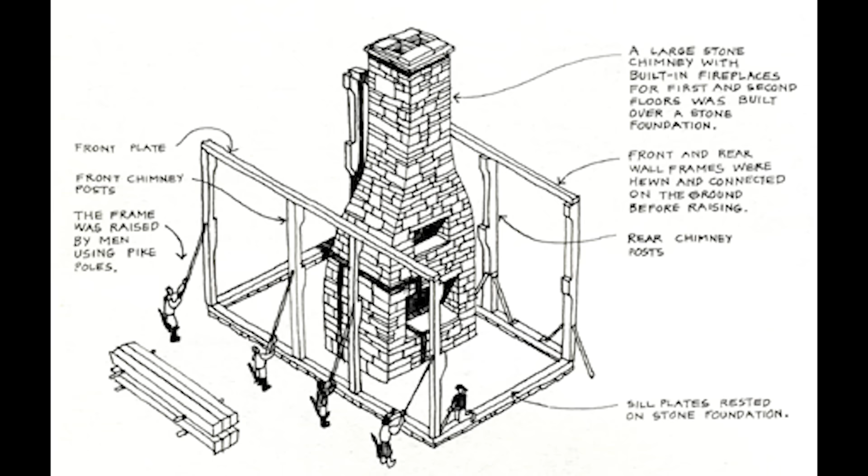The limestone hills of southeastern Pennsylvania cut deep in the winter of 1754 when Johannes Meyer learned that building by the book could kill you. His first cabin followed every rule the English settlers swore by: exterior brick chimney on the gable end, thin log walls, standard and trusted construction that left his family shivering at 38 degrees inside while burning through 2 full cords of wood before February ended.

Across the Pennsylvania frontier, German and English settlers alike were losing the same battle in cabins built exactly as frontier wisdom demanded, waking to frost on interior walls and empty woodsheds. Over the next 2 seasons, Johannes quietly shifted to an older method, building around a massive central stone tower that neighbors mocked as wasteful space. That single change kept his cabin 20 degrees warmer through the coldest nights, cut his wood use in half, and left his chimney warm to the touch 8 hours after the last fire died. What did Johannes understand about heat and stone that every frontier builder was missing?

The Pennsylvania German settlement stretched across the limestone hills like a checkerboard of ambition and old-world memory. By 1753, families from the Rhineland and Swiss cantons had carved homesteads from the heavy timber of chestnut and oak, each cabin representing a compromise between what they knew from Europe and what the Pennsylvania frontier demanded. The immigrants carried guild knowledge in their heads and calloused hands, but the established English settlers had already set the building rules, and deviation meant isolation from supply networks, labor exchanges, and the informal codes that kept frontier communities functioning.

Challenging established building wisdom would mark Meyer as troublesome, potentially cutting him off from the labor exchanges and barn-raising cooperatives that made frontier construction possible. Meyer's own position made the risk more complicated. Unlike many of his neighbors, he possessed genuine masonry skills from his European apprenticeship, but he also needed to establish credibility in a community where English methods dominated.

His first cabin had followed Whitaker's specifications exactly, partly to demonstrate that he could build according to local standards. The results, a cold, fuel-hungry structure that required constant attention to maintain basic comfort, convinced him that compromise was killing his family's chances of thriving through multiple Pennsylvania winters.

The breakthrough came when Heinrich Schmidt, a joiner from the Palatinate who had worked on guild projects involving Kachelofen installations, arrived in the settlement during late 1753. Schmidt carried detailed knowledge of multi-room heating systems where several fireplaces fed into a single masonry mass, creating what he called a heat castle at the center of the house.

European builders had refined these systems over centuries, learning to balance thermal mass, fuel efficiency, and interior comfort in ways that frontier practice completely ignored. Schmidt's expertise provided the technical foundation that Meyer's intuition had sensed but couldn't fully articulate.

The decision crystallized during a March blizzard that killed 2 head of cattle and forced the Zimmerman family to burn furniture to stay warm. Meyer committed to building his new cabin around a central stone chimney that would weigh approximately 8 tons and occupy nearly 1/4 of his interior floor plan.

Secondary channels, roughly 6 inches square, wound through the masonry mass in serpentine patterns that maximize contact between hot gases and stone surfaces. These secondary channels allowed heat that would otherwise escape through conventional chimneys to transfer into the thermal mass, where it could be stored and slowly released over periods ranging from 6 to 12 hours after the fires died.

Stone selection proved critical to the system's thermal performance. Meyer rejected the easily split sandstone that most builders preferred for its workability, choosing instead dense limestone and granite fieldstone that Heinrich Schmidt tested using a simple but effective method. Schmidt heated sample stones in a bed of coals, then monitored how long they remained warm to the touch after removal from the fire.

Limestone held heat for 3 hours and 40 minutes. Granite maintained warmth for nearly 5 hours. Sandstone cooled to air temperature within 90 minutes. The denser stones cost more in transportation and required more skilled cutting, but their superior thermal retention justified the additional expense.

The construction technique followed European masonry traditions adapted for frontier conditions and materials. Each stone was individually fitted and shaped, with no gaps larger than half an inch between adjacent faces. The mortar served primarily to seal air leaks rather than provide structural bonding. The stones themselves carried the compressive loads through direct contact.

Meyer and his crew worked in lifts of roughly 3 feet, allowing each section to cure for 5 days before adding the next level. This methodical approach consumed the entire summer of 1754, far longer than the 8-day cabin construction that Thomas Whitaker's crews routinely achieved. The structural integration with the cabin frame required careful coordination between masonry and carpentry work.

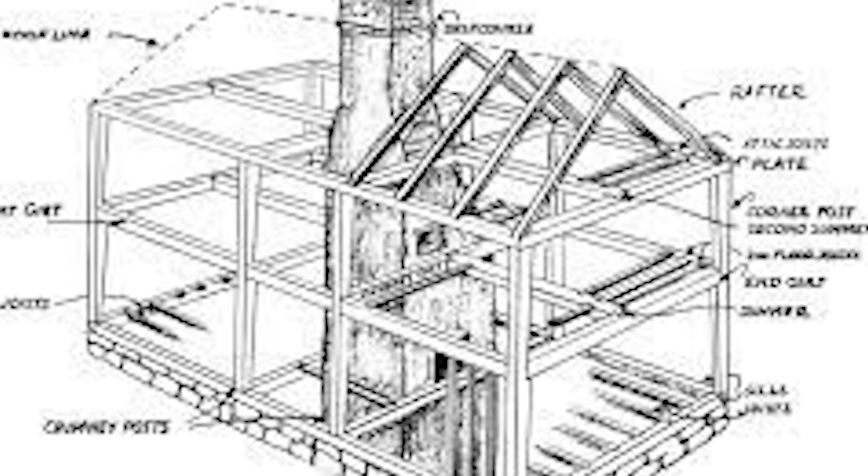After maintaining fires in 3 of the 4 fireboxes for 6 hours, Meyer allowed all flames to die completely, then monitored the surface temperatures using the palm touch method that frontier builders relied upon before thermometers became available. The chimney surface remained noticeably warm to the touch for 11 hours and 15 minutes after the last coals died, with measurable heat radiation continuing for an additional 4 hours beyond that point.

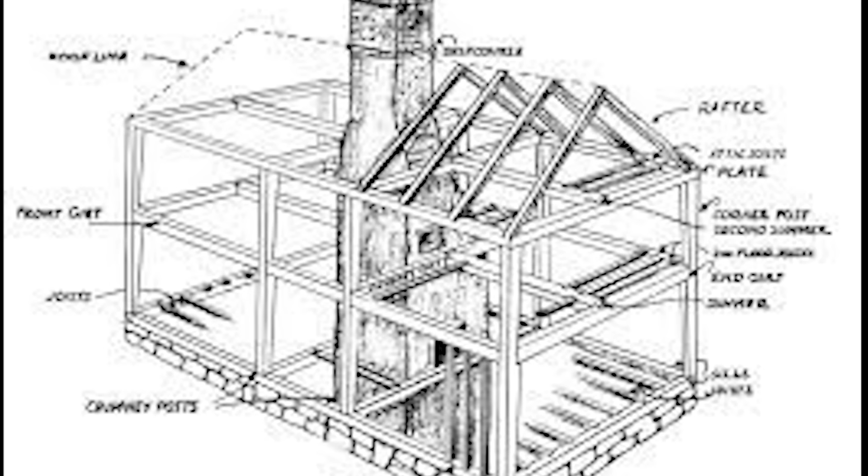By comparison, the exterior chimney on Whitaker's demonstration cabin, built during the same period with identical fuel loads, cooled to air temperature within 3 hours of fire extinguishment. The fuel efficiency gains became apparent during the first extended test period in early October.

Meyer burned seasoned oak split into 18-inch lengths, maintaining comfortable interior temperatures with approximately 60% of the wood that conventional exterior chimney systems required for equivalent heating. The multiple firebox design allowed him to concentrate fuel in whichever room required the most heat, while the thermal mass distributed that energy throughout the entire cabin structure.

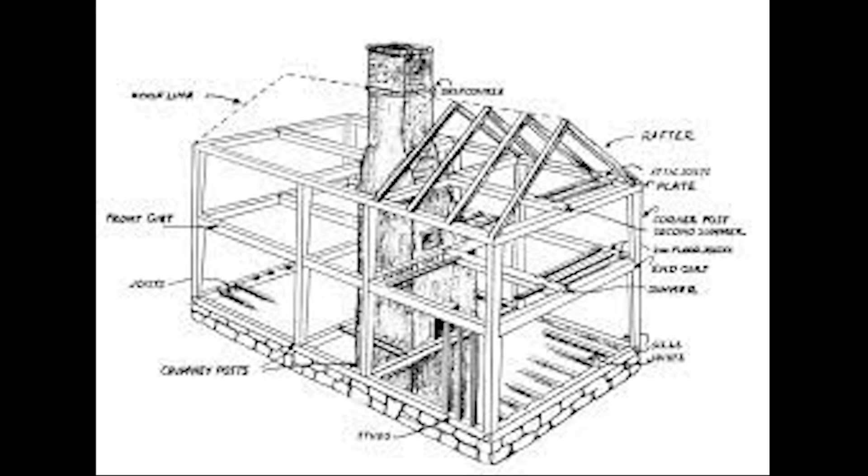The first serious cold snap of November 1754 revealed a critical flaw in Meyer's otherwise revolutionary heating system. Despite the central chimney's impressive thermal storage, interior temperatures still dropped faster than Schmidt's calculations had predicted. The problem became evident during a 3-day storm, when outside temperatures plummeted to 8 degrees Fahrenheit and fierce winds drove snow through gaps around the window frames and door jambs.

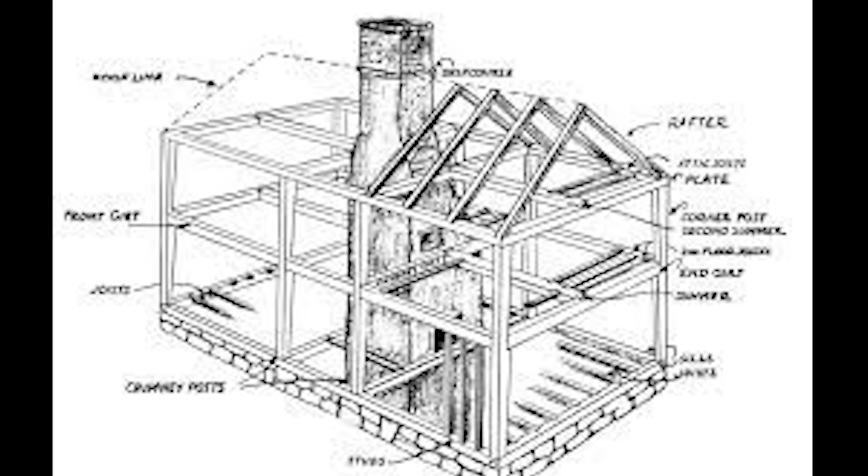Even with the thermal mass radiating stored heat, Meyer recorded interior temperatures falling from 62 degrees at bedtime to 46 degrees by dawn, a 16-degree loss that consumed the chimney's stored energy too quickly and forced him to relight fires earlier than expected. Walkingstone identified the issue immediately during a post-storm visit, running his hands along the interior walls to locate the cold spots that conventional frontier construction created.

The single-leaf stone walls, built according to standard Pennsylvania practice, conducted exterior cold directly through the masonry into the living space. Worse, gaps around the window and door frames created air infiltration that acted like invisible chimneys, drawing warm air out of the cabin and pulling cold air in to replace it. "Good fire. Bad skin," Walkingstone observed, using a hunting metaphor that made the problem clear.

The thermal mass was performing perfectly, but the building envelope was hemorrhaging the stored heat faster than the system could replace it. The solution required a complete reimagining of frontier wall construction, combining techniques that Schmidt remembered from alpine building with indigenous insulation methods that Walkingstone demonstrated using materials available in Pennsylvania forests.

Meyer began the envelope improvements in early December, working during brief warm spells to avoid disrupting the family's shelter during the coldest weeks. The new wall system featured double-leaf construction with an inner stone wall separated from the outer wall by a 4-inch air gap filled with loose insulation materials. The outer wall followed conventional fieldstone construction, but Meyer reduced its thickness to 16 inches to save materials and labor while still providing weather protection and structural support.